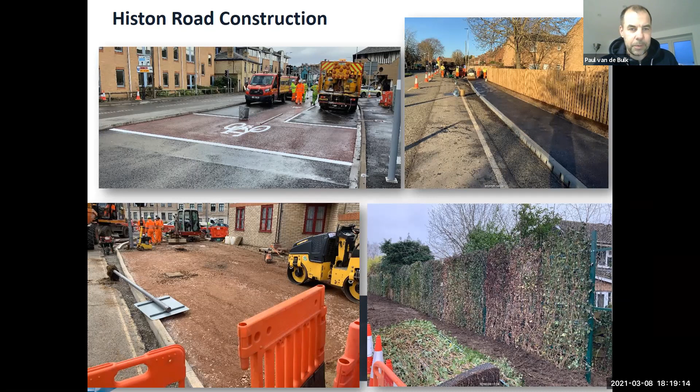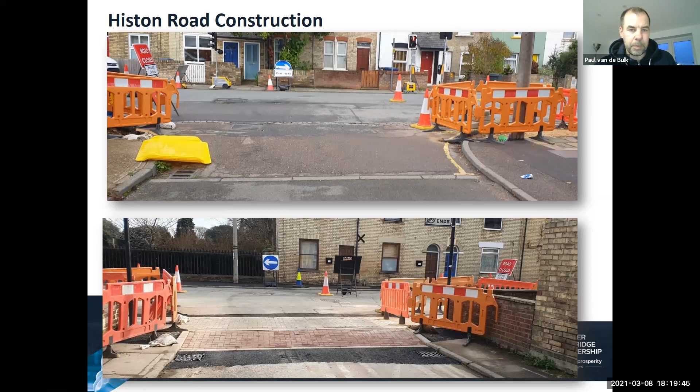Another example - this is a ramp that we put in. There's a couple of slight issues with this ramp, in that if cars go over it too fast, they do tend to strike it. So we're currently looking at whether we can fix that problem. But these kinds of ramps will be placed at every side road, and there's another one already put in further up, I think at Gilbert Close, which is a good example of a big improvement we've made for pedestrians along the road.

We've had quite a few challenges in terms of building it. These pictures all show some of the maze of services that we find under the ground. Some of the challenges relate to the fact that all of the service records that we have, which we also backed up with some GPR surveys and trial holes, we still find that some of the services are not where we expect them to be. So this has led us to encounter a few areas where we've had to do additional diversion works.

This obviously held us up a little bit in places, and also presented some quite significant challenges in some areas. One thing I am quite pleased about is that we managed, in the end, to work with City Fibre and grant a backbone network. So we've come to an agreement whereby we are installing their services for them at the same time as we're doing all of the other work, so that hopefully means they don't have to come back at all and disrupt any of the works we've done.

Some of the other challenges, we've obviously got a challenge with the traffic management. It's quite a narrow highway width that we're working within. We've committed also to ensure that we keep the inbound cycling and the outbound cycling movement intact while we have the outbound traffic as well. In some areas that's caused a slight issue, but I think I'm fairly pleased with the way the gangs up and down the road are managing things. When I visit the site from time to time, probably once or twice a week, I keep an eye out to make sure that if there's any improvements we need, any safety issues, and also work with the gangs to encourage them to pay attention to these kind of things.

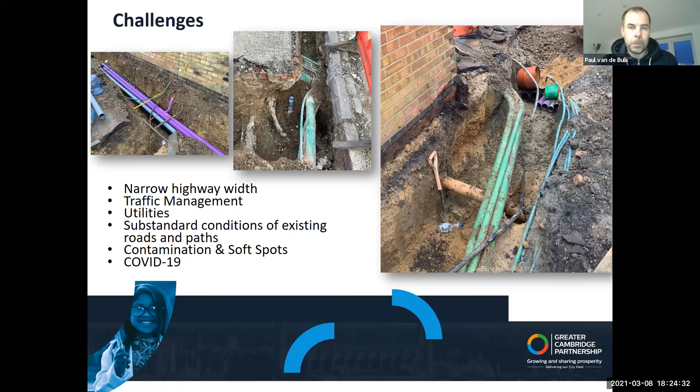So in terms of the programme, as I mentioned earlier, we've got the remaining footway works and all the surfacing works to be completed by the end of March in phase A. We also need to connect, or cut, a couple of loops into the carriageway so that we can fully commission the signals with all the sensors. At the moment, the signals are working without any sensors, which is why there's sometimes a slight delay before the signal goes green.

Phase B: I'm told by Skanska that they are aiming to have the section between Victoria Road and approximately Merkett's Garage completely resurfaced and complete by the end of April. There's also a couple of loops that need to be cut into the carriageway there for the signals. The remainder of phase B, from Merkett's Garage up to Gilbert Road, the target is to have that complete by the end of May.

Following the completion of phase B, they're looking to start work on the junction at Gilbert Warwick Road. They'll commence that in May, and hopefully the works there should take approximately 8 to 10 weeks. While we're completing the works there, they'll be continuing their works on phase D, which is kind of the major part of this project in terms of the work.

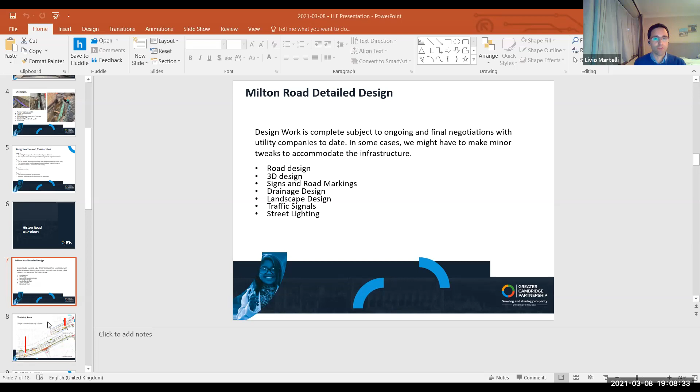Livio, your microphone's crackling quite a bit. Ready? Yep, okay. Can you just carry on, Paul? I'm just going to change it.

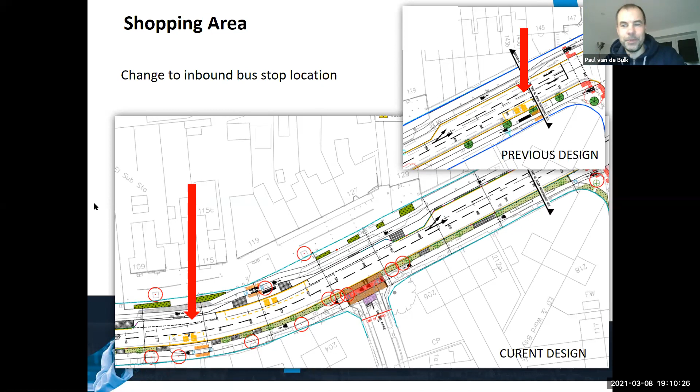Should we hand back to you, Livio? Do you want to take back over, Livio? We can't hear you. I wondered if the chair's still here to help you out, Paul.

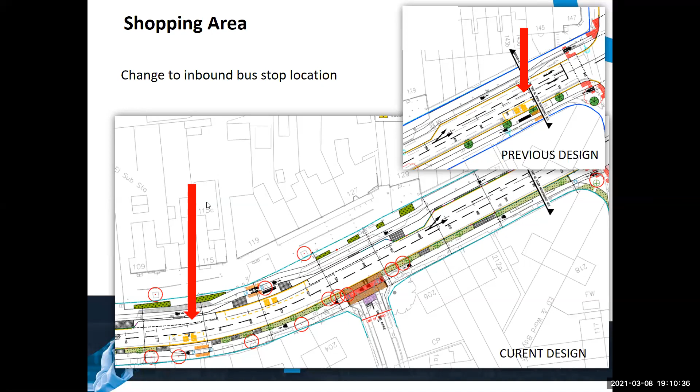Jazz? Don't worry, I'll continue until Livio comes back. All right, so Paul, I'll just move on to the next slide.

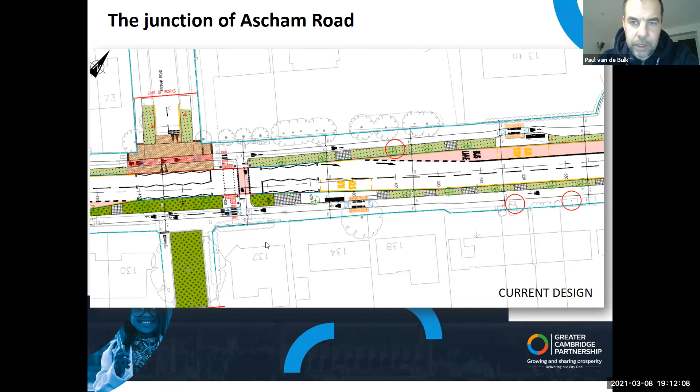With King's Hedges Junction, as shown last time, we're proposing a solution fairly similar to the one at the Warwick/Gilbert Road junction on Histon Road, where we have a circular gyratory for cyclists going completely around the junction, and the crossing points for pedestrians are at the four corners of the junction. This reduces the number of interactions between pedestrians and cyclists. The crossing points would be marked by mini zebra crossings, so at each corner there's a crossing point allowing you to get from the footway to the crossing point.

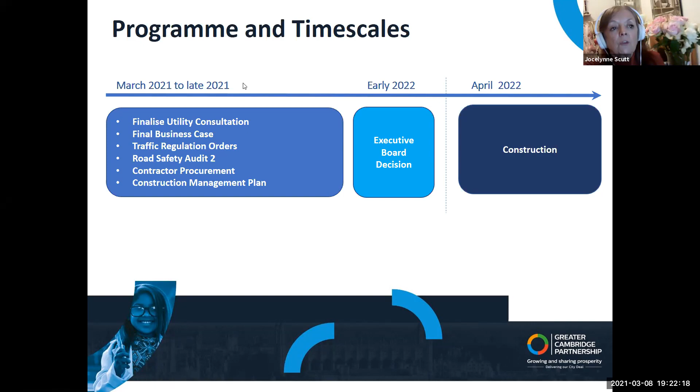Yes, good. Okay, now there's a question from Richard Swift, asking that the LLF should make clear its support for there to be no delay between completion of the Histon Road project and commencement of the Milton Road project. But I will come to other further questions so that we can deliver them together and you can answer two or three at once.

That came before the Histon Road one, so I'm just going through to find it. There have been a large number of questions about potholes on Milton Road, and a question as to whether it's necessary to wait for the project to commence for the potholes to be fixed, or whether the potholes can actually be fixed before. Perhaps if you don't mind answering those two questions, because I know there are a large number of questions about the timing, and I'll go through the list because it's difficult to divide them between what was before Histon Road and now Milton Road.

Thanks, Paul. Okay, so with regard to potholes, I would strongly suggest that they are reported on the County Council's defect reporting tool, which can be found online through a Google search, or we can provide the link in the chat. In the meantime, I would suggest that if there are any significant potholes, they should be reported so that the County Council can assess and fill those that are required, as there will be some that have appeared over this winter that urgently need sorting out.

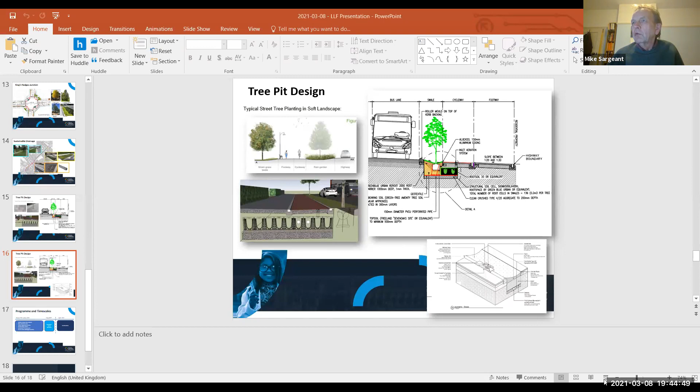Yeah, okay. So I've been in conversation with the County Council and they've signed up a contractor to sort out the potholes on Milton Road. I'm hoping it will be done in March, I'm chasing them at the moment. But my point was really around diversions.

And I was a little bit unnerved by Paul tonight, because all along we've been led to believe there wouldn't need to be diversions, since Milton Road is largely three lanes. But tonight he seemed to indicate there will be some diversions, and I'm very worried about where those diversions will be. Are we talking about Green End Road?

And, Mike, I think you misunderstood me. Well, sorry, but you did say, Paul, well, maybe it came out wrong, that there would need to be diversions at some stage. Now I'm particularly thinking, obviously, between Elizabeth Way roundabout and Arbury Road, where it's only two lanes wide.

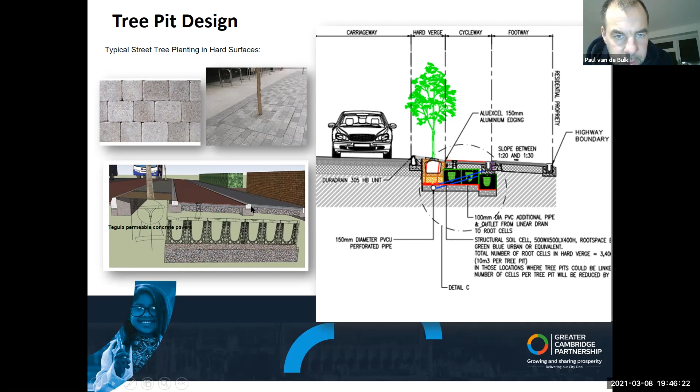Right, could we stop there for a moment and go back to this design, if you answer Paul about the bus stops, since that was what Councillor Bird asked as well as our attendee, and then we'll come to the diversion question. Okay, just so Livio can prepare, I'm going to ask Livio to cover the bus stop location question. Going back, this image doesn't show the exact design, but it shows a representation of what I was talking about, the curb laid on its side to provide that kind of slope.

You're right, and then we'll go. Councillor Bird, is this the diagram? That's right. So you've got King's Hedges at the top, yeah? No, King's Hedges to the top. Okay, so this is Green End Road. This corner here between Green End Road and Milton Road is a very tight corner. Are you taking away some of the corner of the road to make this wider?

The best person to answer that will be Arthur, so can I bring Arthur in to answer that? Yeah, okay, thank you. Yes, the shortest answer is yes. We narrow the carriageway slightly to make this corner bigger. I think we narrowed the carriageway over there by approximately 800 millimeters, so we're not going to have this kind of black spot that exists at the moment. So yeah, the shortest answer is yes, we're widening slightly at this point.

Okay, and can I just go back? So these dotted lines, are they going to be the crossing for people to use? Yes, that's the pedestrian crossing, that's the area where the pedestrians cross. The red next to it is where the cyclists are, we provided the crossing facilities for cyclists. Right, okay, lovely, thank you very much for that.

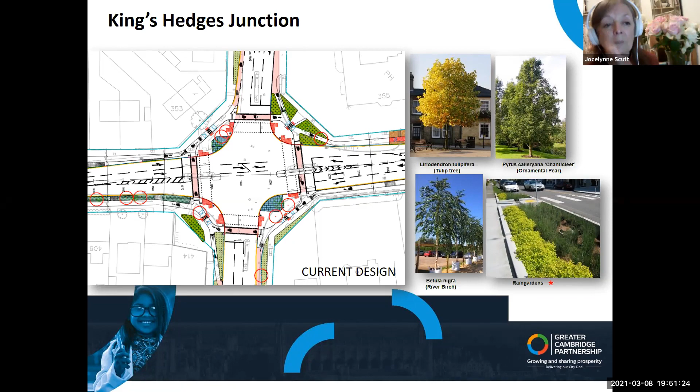Good. Now, I haven't forgotten the question about the delay, but there's also the question about the bus stops. Could we get up on the screen the part of the road design that Livio is going to answer? And while that's coming up, perhaps Paul could address the issue that some people want more bus stops - is that possible or not?

Thank you. So the location of bus stops, we discussed as the gentleman implied, at workshops, at LLFs, with stakeholders, with Stagecoach, with a lot of people. What we've looked to do is we haven't reduced the number of bus stops between Arbury Road and King's Hedges, but we looked to pair them up, because at the moment they're spread in a strange way. Following that consultation with the operators, we've paired the bus stops up and provided fairly even spacing along that stretch of road.

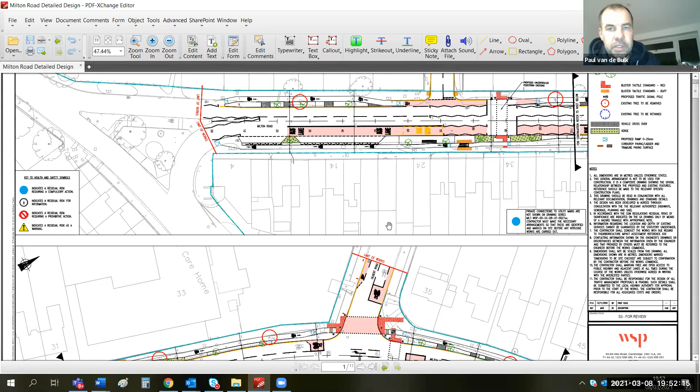Good, thank you. Now, while Livio is explaining this, we haven't forgotten that we have Lillian Rundblad and Michael Page, and we need also to address Richard Swift's question about no delay, please. So, Livio, go ahead. Thank you.

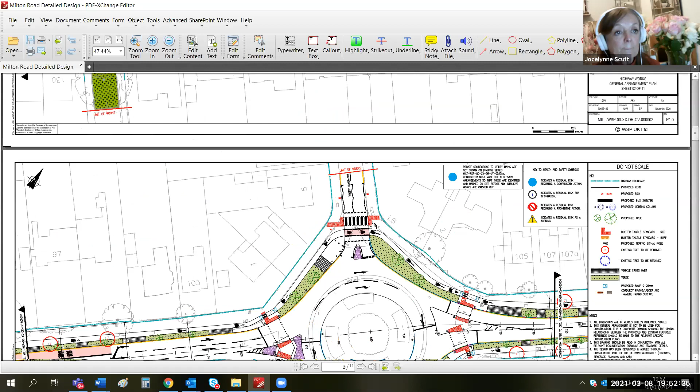Where are you going? Who's driving this? You're muted, Livio.

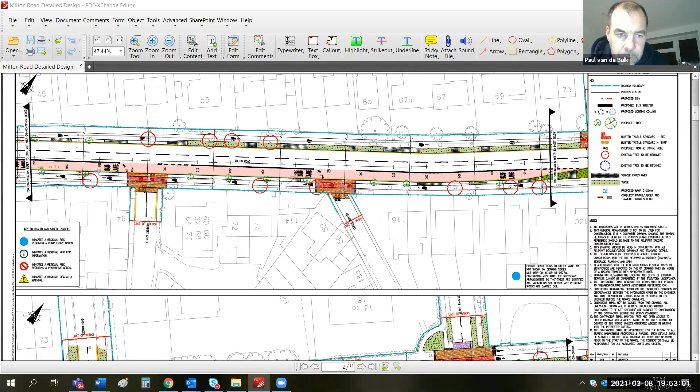I suggest, while you're in this location, just stop at Hurst Park Avenue, which is just on the screen below. So the change - basically the only thing we've done is the footpath, as you approach Milton Road, we've just moved a small bit of verge to the side to allow the footpath to continue onto Milton Road. But it's a very minor change.

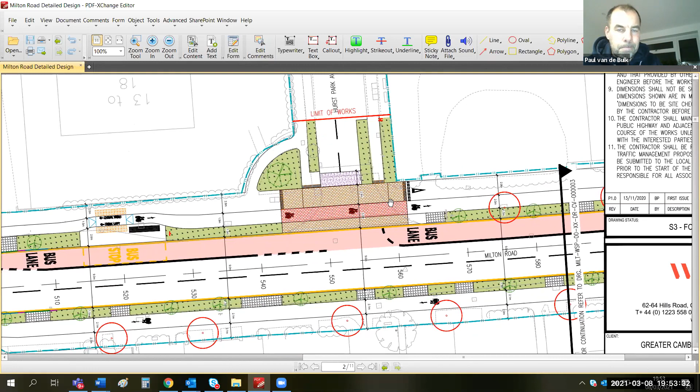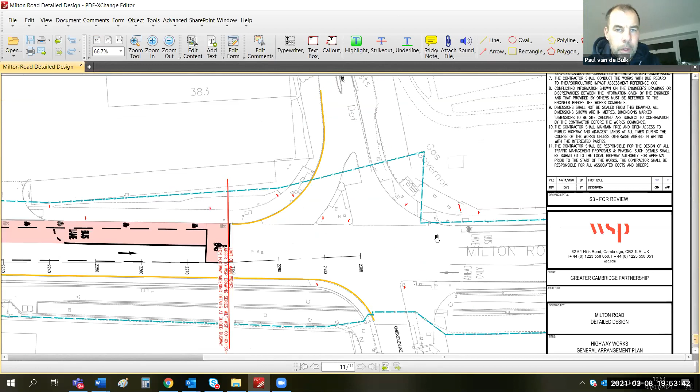Thank you, and now if we go to Seeley's Court, which is to the north of the scheme. Back one. Arthur, do you want to cover this, or Olivia? I'm happy to cover this one.

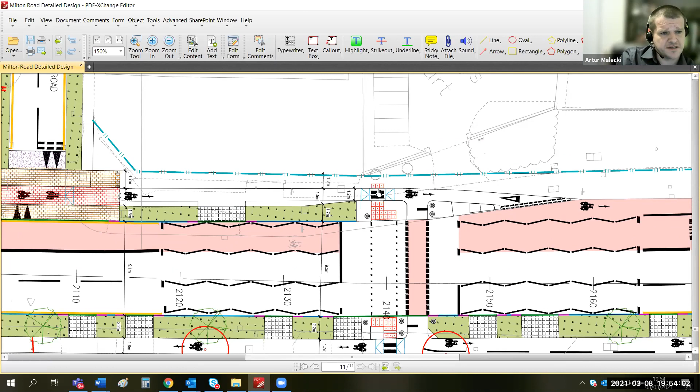Basically, in the previous design, we had a 1 meter pinch point, and that's what we've amended. The issue here is with the property boundaries to the west, to the top of the page. We rearranged this area slightly, and to address this issue we widened the cycle lane - actually narrowed it to 1.2 meters - and narrowed the footpath to the absolute minimum, which is 1.2. We could potentially go even to 1 meter for this section, but we've spaced it evenly. Because it's on the approach to where cyclists are expected to rejoin the carriageway, we don't see this now as an issue.

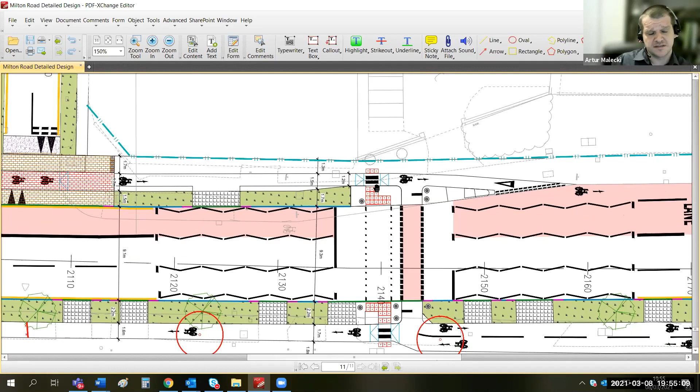This area will be flat and flush, so it won't be a curb-delimited cycle lane - there will be a small upstand of up to 6 millimeters, so bigger bikes like cargo bikes or trailers can still mount a little bit of the crossing and pass safely. Unfortunately this is the only location where we can provide the crossing, and we're not able to do anything further. So we appreciate it's a little bit compromised, but it still fulfills all the requirements at the moment.

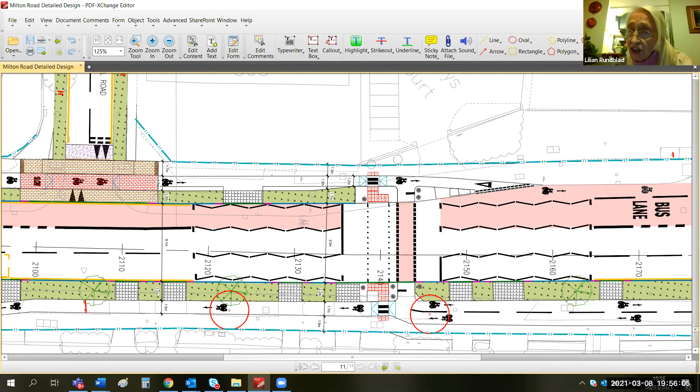Well, mine was also regarding diversions, and partly Paul has answered it. My question was whether there would be both formal and informal diversions affecting Histon Road. You said you envisage something, but that was more about Mike Sargent's question, close to Milton Road.

Could you also say that there are no planned diversions, formal or informal, for Histon Road? I can't tell you exactly where every driver is going to go, but as far as I can foresee, there wouldn't be a formal diversion on Histon Road when we construct Milton Road. No signage along King's Hedges would divert traffic to Histon Road. There will be roadworks signs to inform people that roadworks are happening, but if we maintain two-way traffic, we don't need to divert traffic elsewhere.

Right, Paul, thank you very much. The other thing to say is it's quite important we maintain a fairly good two-way flow, because we've got an important bus route on Milton Road, so we want to keep that going. But given the width we've got to work in, I'll be working with the contractor to ensure they put a plan in place that allows that as well as we can. Keep my fingers crossed.

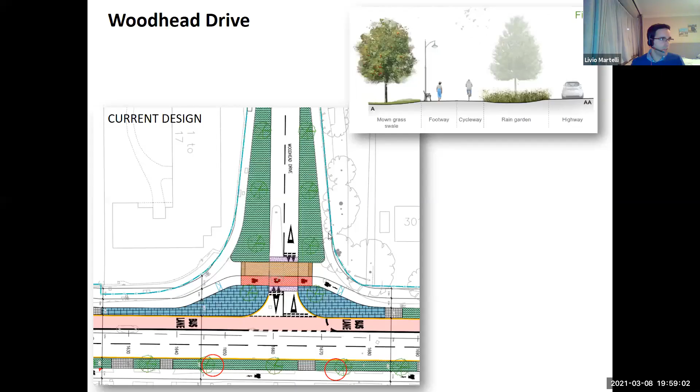In terms of trees, we've got 117 existing trees that we're proposing to remove, and 192 new trees proposed to be planted, so we've got a net gain of 75 trees in total for Milton Road. Right, thank you then, Livio.

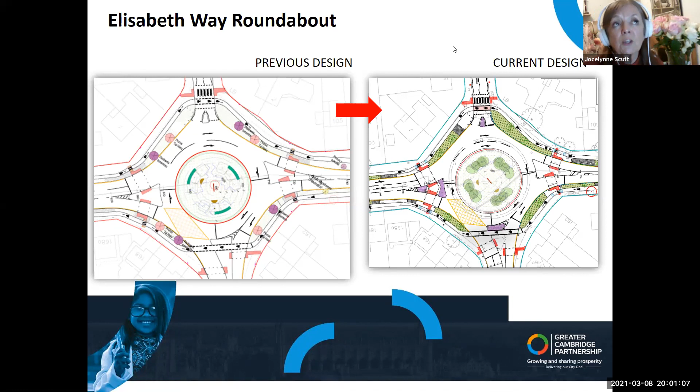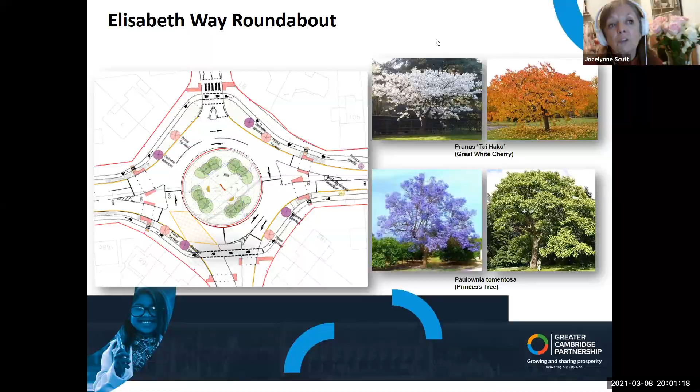Thank you. Now we really need to come to the question of whether there will be any delay. Our original understanding was that there would be some crossover between Histon Road and Milton Road in terms of the projects going forward. I'm aware, from residents contacting me, that there is concern about delay. Richard Swift has expressed it, and I think Michael expressed it too. I did draw up a possible resolution on the question of delay so that we can keep tabs on what is happening and ensure there won't be any inordinate delay.

If there are reasons for having a pause after the completion of Histon Road and the commencement of Milton Road. Jocelynne, before you go to the resolution, do you want me to provide some context? If you would, yes, thank you.

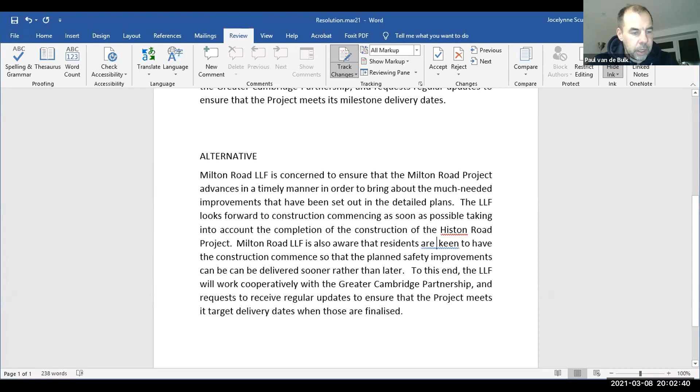So the whole issue of the programme and timing of the construction of Milton Road. Back in the day, Milton Road was actually in advance of Histon Road in the programme when I took it over, but for some reason we've managed to progress Histon Road faster, and a decision was taken along the way to get the construction of that completed, which was probably a pragmatic decision because there would have been some delay to Histon Road otherwise.

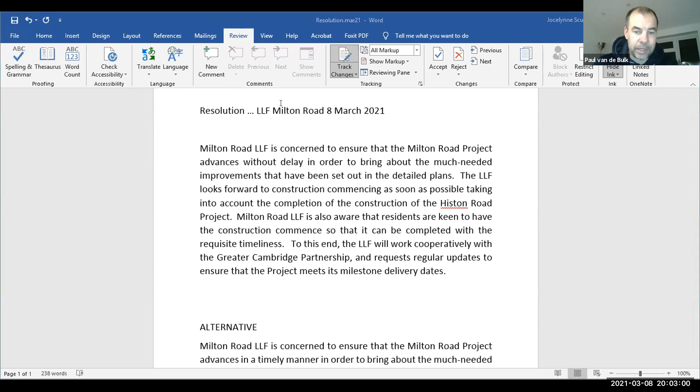In developing the construction management for Histon Road, which involved the inbound closure, there was a lot of representation, a lot of discussion with local people and with wider stakeholders from outside of Cambridge, council members, etc, and consultation with the road traffic management team at the county council, who basically give out the permits in terms of what we can construct.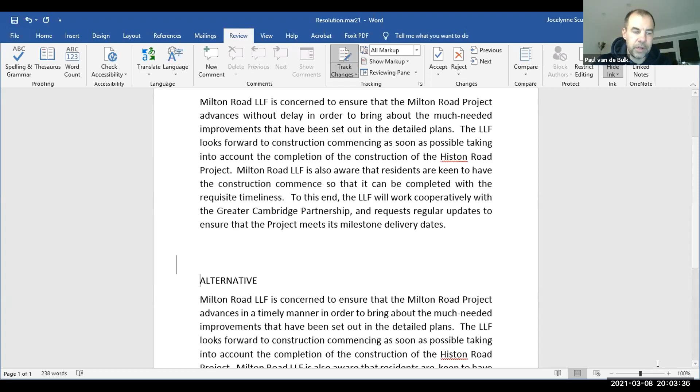So a lot of discussion was had. There was a very clear view put forward at that time that the two projects should definitely not overlap, and I think there was also some representation that there should be a bit of a pause between the completion of Histon Road and the start of Milton Road. At the moment, that position has been listened to, and a position has been taken whereby we have introduced such a pause between the two projects.

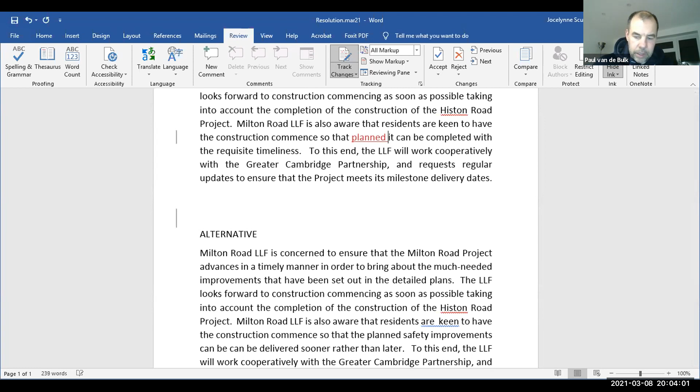So in some ways, I would also potentially like to get Milton Road underway as soon as possible. We've done a lot of work - there's been an immense amount of work with the LLF and with local residents, for example with the design team. So it feels good to keep the momentum going, and we don't want to lose that momentum. I'm very keen to get started on the project.

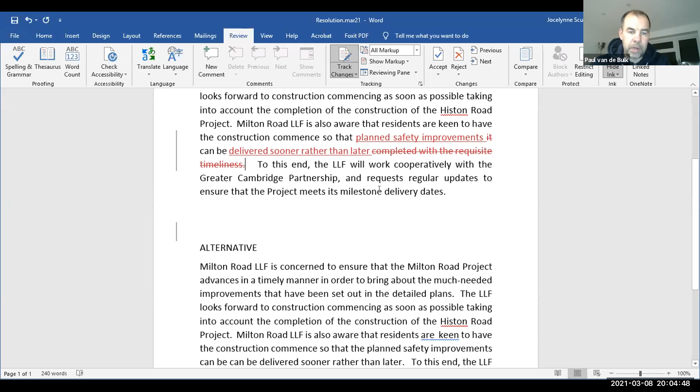However, we have to take into account that these projects have fairly severely impacted residents in the north of Cambridge. There is representation from wider afield that we have a pause between the two. There are some pragmatic reasons why we might introduce a pause. For example, it reduces the risk that any delay to Histon Road, or maybe the Darwin Green Junction development, has an impact on our programme start date.

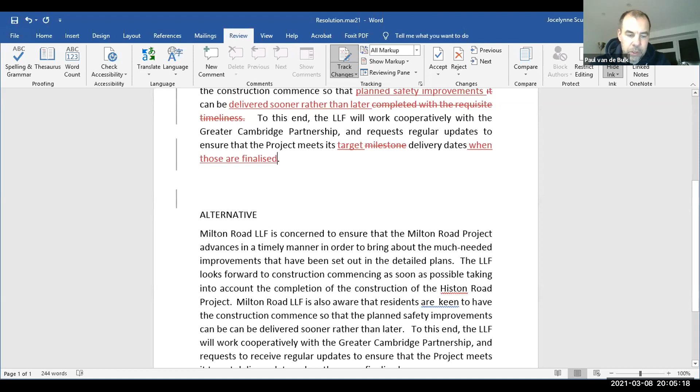It allows us to complete any snagging works that develop on Histon Road without having Milton Road under construction and possibly impacting on that. It also provides a small window of opportunity for the county council to undertake any emergency maintenance works or emergency utility works that have been on hold. I know there have been quite a few placed on hold while the Histon Road project has been underway, so there is a small window of opportunity.

So there are some good reasons to have a pause between the two projects. I fully understand that many people are keen to get the project underway, as I am also.

So I think what Jocelynne is proposing here is that the LLF, aside from me, needs to take a view. But what I would ask is for support in setting out, getting the position firmed up by the board perhaps, and then ensuring that we keep to that position.

Right, so as I understand what you're saying, Paul, is that there's a proposal that there be a 10-month hiatus between the completion of Histon Road and the commencement of Milton Road. The view, as expressed to me by some residents, is that they do not want to wait 10 months. I do think that, as you have acknowledged too, we've gone through an extremely long process, and residents have been at the ready, in a sense, for this to go ahead.

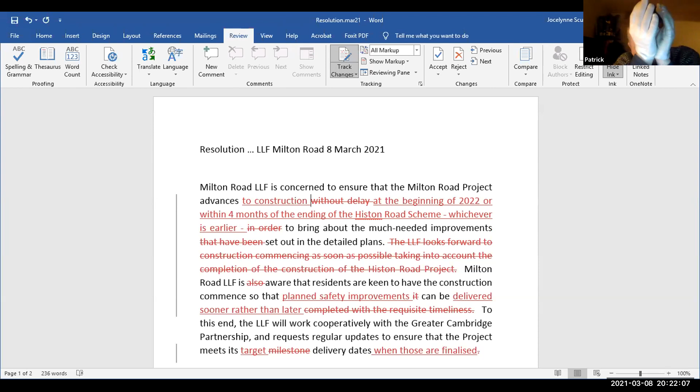Is that okay? Jocelynne, your first sentence, 'the project advances' - I think you have to say advances to construction at the beginning. Advances, where does it advance to? Or completion? No, construction. I'm not sure, Justin, if the last sentence actually adds any more. Sometimes less is better. Oh, well, the only thing was that we need to say that we're going to cooperate, that we're not being argumentative or anything.

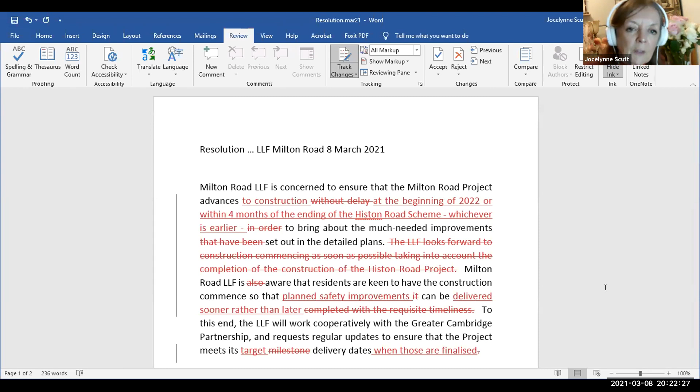Or do you think it's not necessary the way that it is? No, because I think you're just building extras in. I think short and punchy is the best. I'm happy to be argumentative on this one. Okay, sooner rather than later. So full stop after later. Let me just do it.

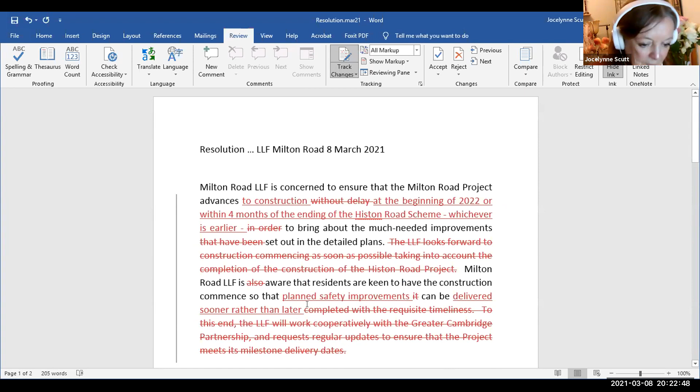Oh, this actually is not bad, is it, that we can do this? So: Milton Road LLF is concerned to ensure that the Milton Road project advances to construction at the beginning of 2022 or within 4 months of the ending of the Histon Road scheme, whichever is earlier, to bring about the much needed improvements set out in the detailed plans. Milton Road LLF is aware that residents are keen to have the construction commence so that planned safety improvements can be delivered sooner rather than later.

Is that okay? Well, it can be, it's fine. Oh, do you think so? Shorter, okay. You got your dashes? I like it because it's more certain, isn't it? It's a bit more direct. Yeah, wait. Good. B, I think maybe B. I'd go for a subjunctive. Jocelynne, please can we stop this drafting in committee and adding subjunctives and the like? Drafting in committee never works properly.

The hostage to fortune you put on this one here is 'the ending of the Histon Road scheme'. That can be defined however it suits people. We actually want to get this underway straight away. The problem is that the concurrent activity, which was originally planned, things like the TROs, which can be going on while Histon Road is still having spades wielded on it, doesn't seem to be happening. So Mike Sargent's putting 'advances to construction' in is excellent, but I would get rid of 'the Histon Road scheme', which can be interpreted as when they finally finish painting the curbstones.

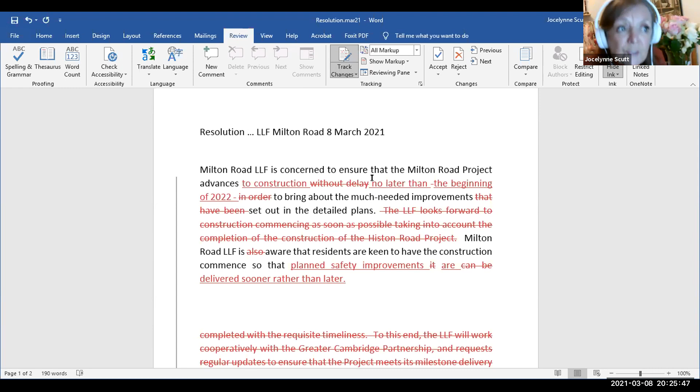I think it is good to have that last sentence, because one of the things in the ether was the suggestion that residents don't want it to start soon, whereas I think we do want it to start soon so that it will be finished sooner, because we want our nice road without the potholes.

Okay, what about 'will be' instead of 'are'? Oh, seriously, I think we're all clear what it is. It's 20 minutes, 5 minutes after 8. On a serious point, Jocelynne's done very well chairing this meeting, but attendees are dropping off and complaining. I think we're all clear what it was. Can we just agree it and vote on it, please? Okay, sorry to be grumpy. No, that's all right.

So is everybody happy with this resolution, that it goes forward from the LLF to the Greater Cambridge Partnership next week? Please. Good. Is there anybody who dissents? No. So it's passed then, I'd say by acclaim. I shouldn't have a capital letter, but anyway, there you go.